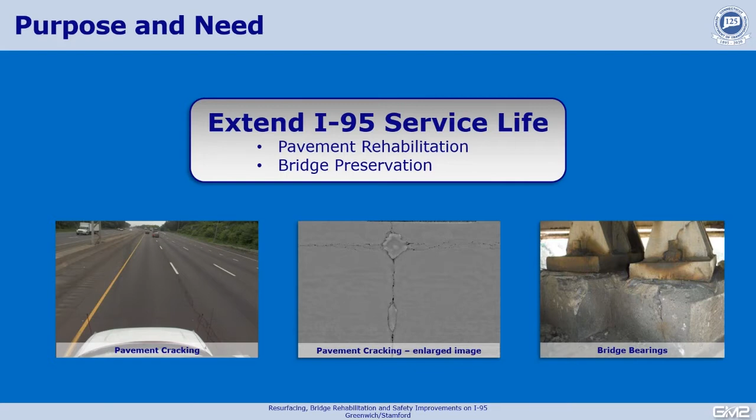According to the National Highway Traffic Safety Administration, approximately 36,000 people die and 3 million people are injured each year on America's roadways. The Connecticut Department of Transportation is committed to improving safety on our highways, and therefore it is a primary purpose of this project. Safety improvements for this project include, but are not limited to, upgrading the median and roadside barriers, upgrading and installation of MASH-compliant guide rail, upgrading the lighting, and upgrading the signing.

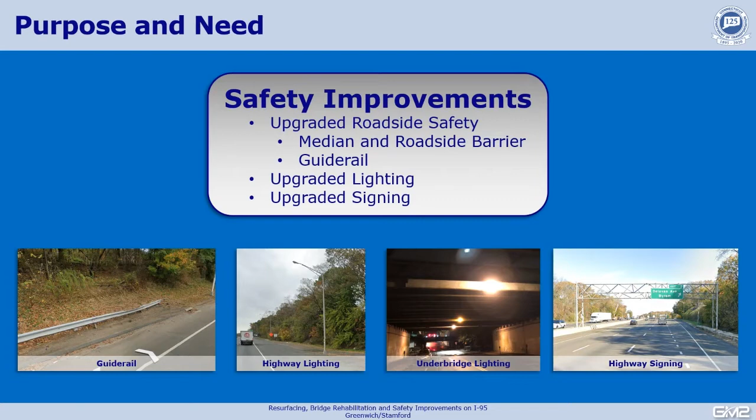While the primary purpose of this project is to preserve and extend the service life of I-95, a secondary opportunity or spot improvement was identified to extend the deceleration lane at exit 3 southbound, which would provide operational and safety benefits as well as congestion relief at this exit. We will discuss the proposed improvements in more detail shortly.

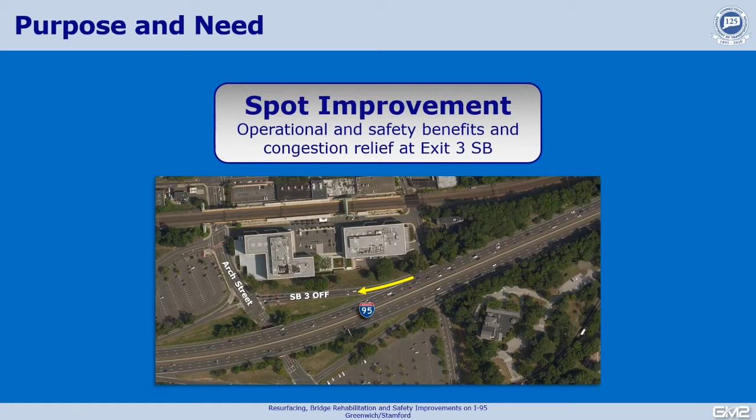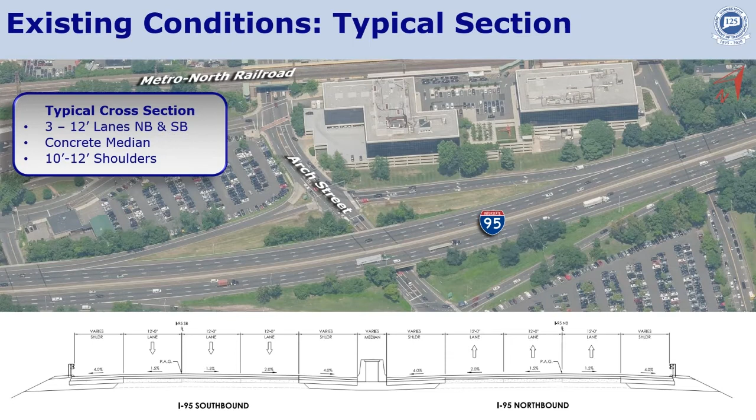Throughout the project limits, the I-95 corridor has 3 lanes of traffic in each direction, separated by a median barrier varying in height between 32 and 45 inches. The cross-section consists of three 12-foot wide lanes in each direction, an inside or left shoulder between 10 and 12 feet wide, and an outside or right shoulder varying between 10 and 11 feet wide. The cross-section will remain as it is today. There is no widening proposed other than the exit 3 southbound deceleration spot improvements previously mentioned.

Crashes were concentrated at the interchanges; however, there was no apparent accident pattern at any one location that would suggest substandard design elements. By far, the most striking pattern observed throughout the project area was rear-end crashes, indicative of congestion, followed by sideswipes, indicative of weaving, cars traveling from one lane to the next, and finally, roadway departures or fixed object crashes, which our roadside safety improvements will address.

As previously discussed, one of this project's primary purpose and needs is to extend the pavement life and restore functionality. As part of that effort, we developed an extensive pavement data collection and evaluation program to document existing conditions and develop a pavement rehabilitation strategy for this project. We utilized digital imagery and the latest technology and performed a pavement surface condition survey, which documented and evaluated the pavement distresses at the surface level. We then mobilized GPR, or ground penetrating radar, to document deterioration and distresses at the subsurface level.

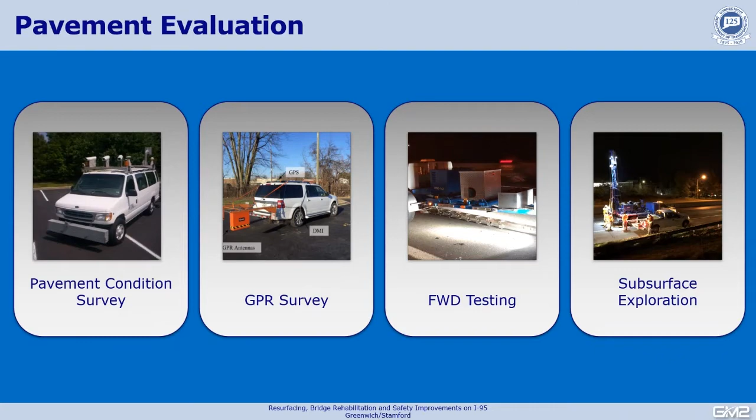Thank you, Tony. Now that we've covered the project background, I'm going to switch gears and discuss our proposed design, starting with the overall scope of improvements. Here is an aerial of I-95 Interchange 3 at Arch Street, with southbound heading to the left side of your screen and northbound to the right.

This project will address substandard roadway cross slopes on the northbound and southbound side. All substandard median will be replaced with standard 45-inch tall F-shaped barrier. Drainage pipes and outlets will be replaced or cleaned. Some selective tree clearing will be necessary for construction and sight distance. All lighting will be upgraded and moved to the median wherever possible.

20 bridges within the corridor will be rehabilitated. All overhead and roadside signing will be replaced. All roadside safety will be upgraded, including the installation of standard MASH-approved guide rail. Also, the pavement condition data that was collected will be used to target and repair the slabs and joints as necessary. And finally, the previously mentioned spot improvement on I-95 Exit 3 southbound, which we'll take a closer look at now.

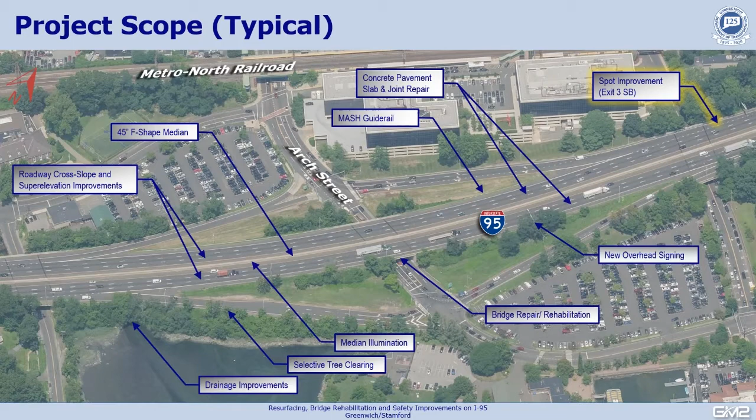Depicted here is a zoomed-in aerial of I-95 in the vicinity of Exit 3, with I-95 southbound again moving to the left and northbound to the right of your screen. This is a particularly congested off-ramp with over 137,300 vehicles per day traveling south, and 10,600 of those vehicles taking the exit each day. Due to these volumes, drivers experience backups onto the main line, which result in higher than normal concentration of crashes.

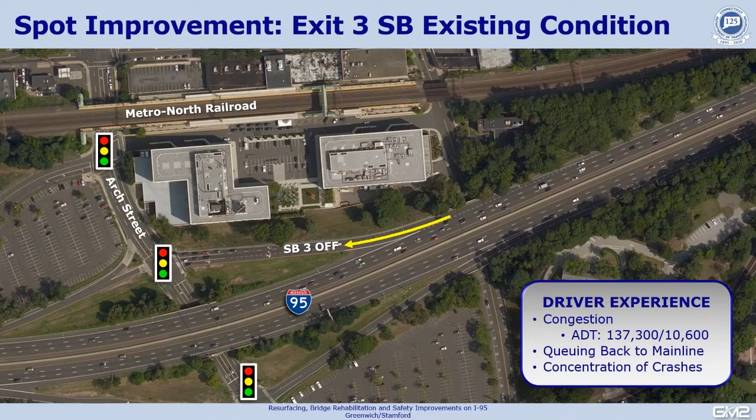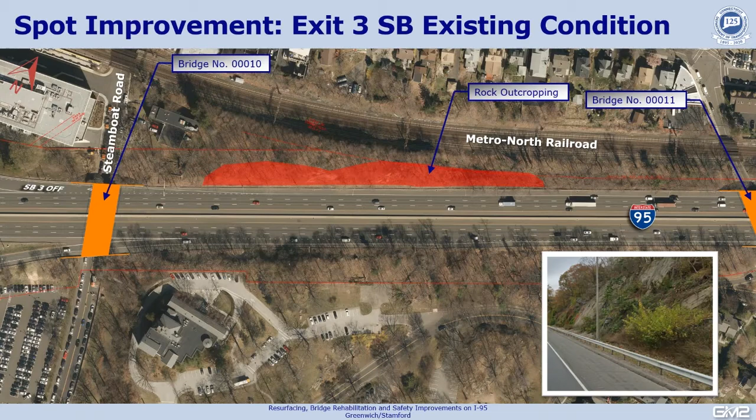Before outlining the proposed improvements, I'll give you some more detail regarding the constraints in the area that needed to be taken into account during the design. Here again, we have I-95 running from left to right. Highlighted in orange are the 2 bridges in the vicinity, bridge number 10 on the left and bridge 11 on the right. Here, highlighted in red, is an existing rock outcropping along the outside of I-95 southbound.

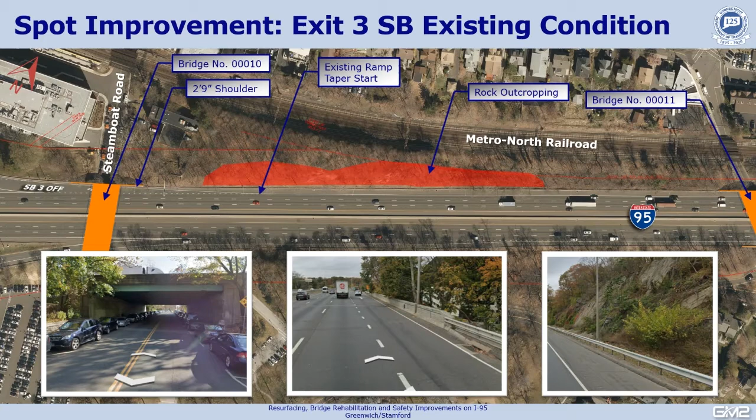And here you can see the bottleneck created by bridge 10, where the shoulder narrows to as little as 2 foot 9 inches. And finally, we needed to take into account the heavy parking needs below bridge 10 when developing a context-sensitive solution.

Now that we know the background of the area, I'll walk you through the proposed spot improvement at I-95 southbound Exit 3. The thin section of yellow along I-95 southbound indicates the new pavement being added. The blue indicates the section of rock outcropping that is being removed, and the red indicates the portion of rock outcropping that would remain untouched.

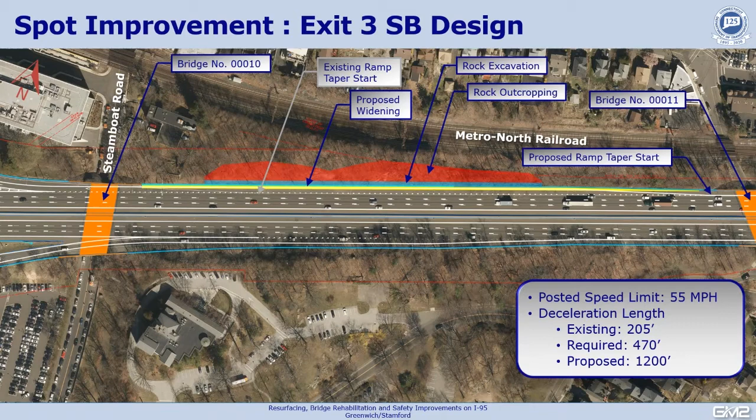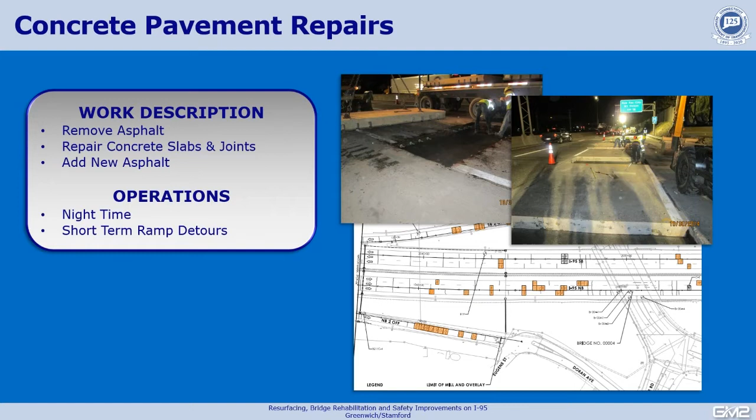Here is a slide depicting the proposed concrete pavement repairs. To the right are pictures showing the operations, and below them is a sample of our plans depicting the concentration of repairs shown in orange. The work entails the removal of all asphalt, exposing the concrete slabs below, repairing the slabs and joints using the data collected as a guide, then the addition of the new asphalt on the newly repaired concrete. All work is proposed to be done at night with short-term single night ramp detours to minimize impacts to the traveling public.

As previously mentioned, there are numerous bridges being rehabilitated as part of this project. There are 23 bridges in total. 3 overpasses have no proposed improvements, leaving 20 in the contract. 2 of these bridges are over navigable waterways, bridge number 1 over the Byram River and bridge number 6015 over the Mianus River. The repairs include the replacement of median on 3 of the bridges, deck repairs and asphalt replacement on all, improved lighting under the structures and bearing repairs, and the relocation of utilities whenever they're present.

We already mentioned the improvements being made to the drainage network. We'll go into a little bit more detail now. Many of the pipes along the corridor, especially the metal ones, have reached their serviceable life and are deteriorated beyond repair. Nearly all the pipes are inundated with hardened sediment, and outlets are clogged and catch basins are in various state of disrepair.

Proposed improvements to the drainage system include the cleaning of all remaining structures and pipes, outlet protection installation, new structures and new pipes where required, improved swales and water quality, and the construction of access roads.

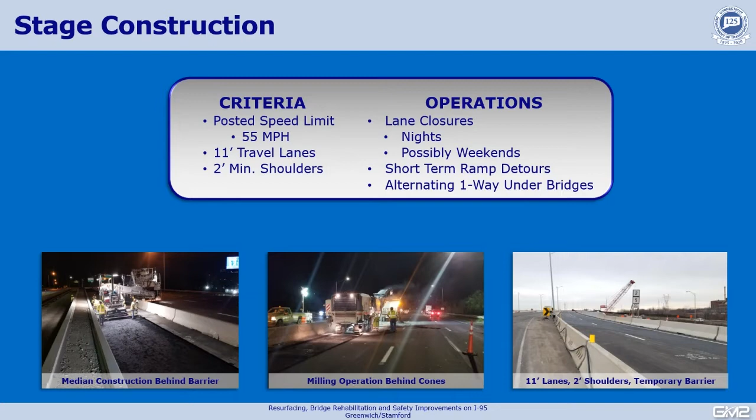Short-term detours will be required, and for the most part, alternating one-way traffic will occur underneath I-95 bridges over local roads. Below you can see some typical construction activities. On the left is nighttime median reconstruction behind barrier. In the middle is a milling operation behind traffic cones. And on the right is a typical daytime traffic pattern with 11-foot lanes and 2-foot shoulders.

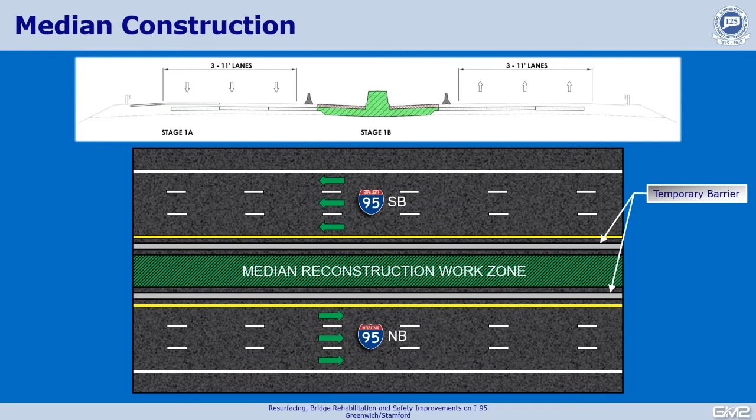This slide depicts the stage in which the median is being reconstructed. This work is highlighted in green in the cross-section picture above and the graphic below. Traffic will be shifted away from the median and protected by temporary barrier while the median is being reconstructed. Again, these will be 11-foot lanes and a 2-foot minimum inside shoulder with a wider shoulder on the outside.

Now that the median has been reconstructed, traffic can be shifted to the left-hand side in each direction. The barrier can then be moved to the outside of the highway so that work can be done to the shoulders safely. This is also the stage containing all of the concrete slab repairs, which I'll go into more detail next.

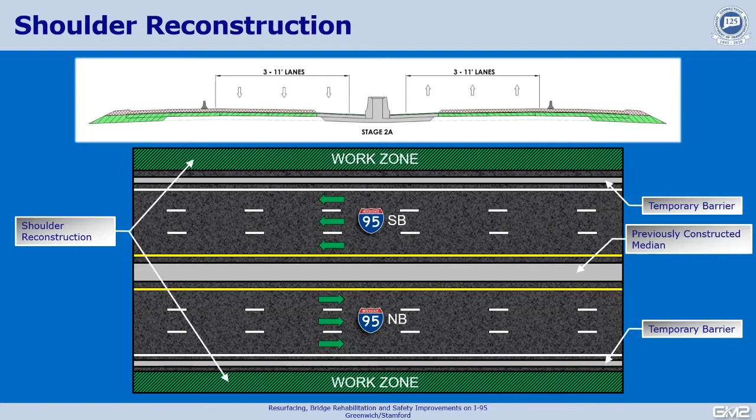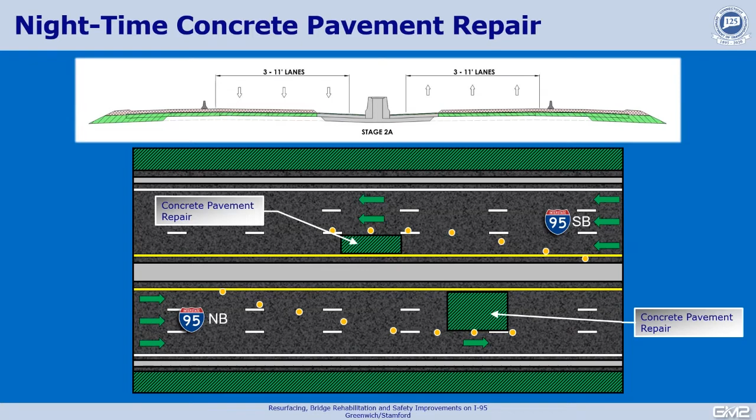There will be short-term impacts to local roads crossing underneath I-95 as repairs are being made to the bridges. Most of the roads will remain open throughout construction, utilizing either alternating one-way traffic or reduced roadway width while all lanes are operational. The work being done on the bridges over South Water Street and River Avenue require temporarily closing

To evaluate the environmental impacts associated with this project, there are various permit requirements, including the NEPA process. We will obtain the necessary permits for flood management and construction activities, and as the design progresses, coordination will be required with the Coast Guard, Fisheries, and Army Corps.

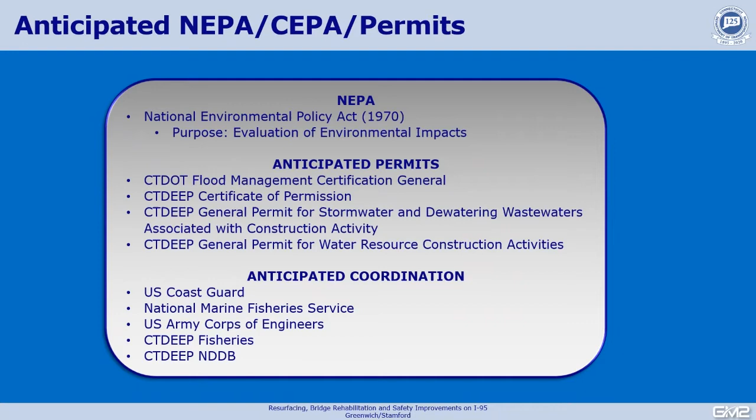Some of the proposed bridge rehabilitation activities will result in impacts to the operations at the commuter lots in the vicinity of Strickland Road, River Road, and South Shore Drive. These will be short-term partial closures during construction activities only. We will coordinate with the Greenwich parking official to ensure these impacts are as minimal as possible. And with that, I'd like to hand it back to Tony, who will discuss the upcoming schedule and costs.

Thank you, Ryan. Now we will discuss project schedule and project costs. In terms of schedule, this evening is the formal public informational meeting, the purpose of which is to increase awareness, engage a wide audience in information sharing and discussion, but most importantly, receive feedback from the community and stakeholders. Prior to this evening, we met with the town of Greenwich officials in October to inform and receive some initial feedback about the project. We are available to meet again with both town and city officials, as well as any and all stakeholders to continue information sharing and discussion.

Next steps will be design approval and NEPA approval anticipated in March of this year. That will authorize us to proceed with final design, which would be completed in March of next year. We anticipate to go out to bid in the summer of 2022. The contractor with the low bid would start construction, or shovel in the ground, by fall of 2022. We anticipate a 3 to 4 year construction duration.

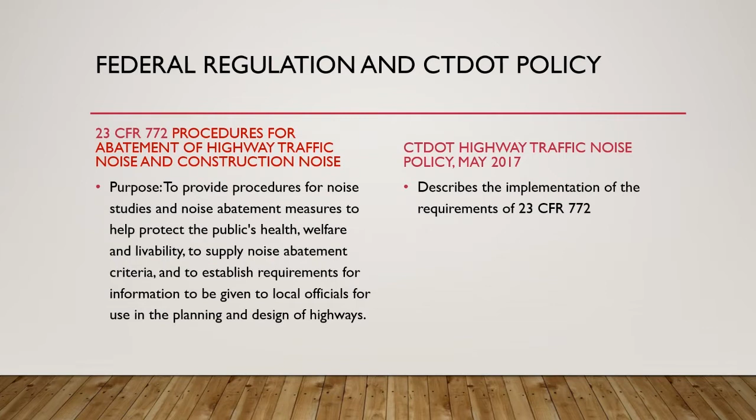Next slide. The regulation requires noise to be analyzed when a project is funded with federal aid highway funds or if it requires FHWA approval regardless of the funding source. It also must meet the definition of a Type 1 project.

Next slide. A Type 1 noise analysis is required for a proposed project that consists of a new highway built on a new location, interchange modifications, an existing highway that is significantly altered by substantially changing the horizontal or vertical characteristics of the road, or the number of through lanes are being increased, as well as if auxiliary lanes are added, meeting certain length criteria defined by FHWA and Connecticut DOT.

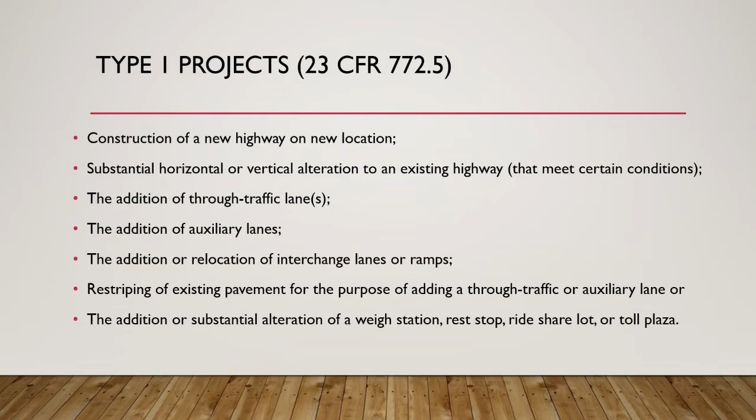The project's proposed resurfacing, safety improvements, and bridge rehabilitations did not meet the eligibility for conducting a noise analysis, and therefore one was not conducted under this project. Thank you, Neil. Back to you.

Thank you, Christine. We understand, obviously, there are quite a few questions in regards to the requirement for noise barriers. It is a similar concern that we have throughout our state projects, throughout the state. And again, the type of project, as Christine mentioned, dictates how we go about pursuing if a noise study is required.

And again, in this case, our purpose and need is specific to what we call state of good repair, and we want to address the pavement conditions. We want to address the minor bridge rehabilitations. We are not expanding the highway with this project. It's really to extend the service life of the existing pavement surface and upgrading those safety improvements.

So I'm going to see what other concerns we have here, and we've got a question. What is the impact to exit 2 going south? Are we widening the lanes there? And I guess there's a follow-up to that. Will this presentation be recorded and posted to the site? Yes, I'll answer that second one real quickly. A copy of this presentation will be available after the meeting on our project website. So again, what is the impact to exit 2 going south? Are we widening the lanes there? So Tony, I will send that over to you.

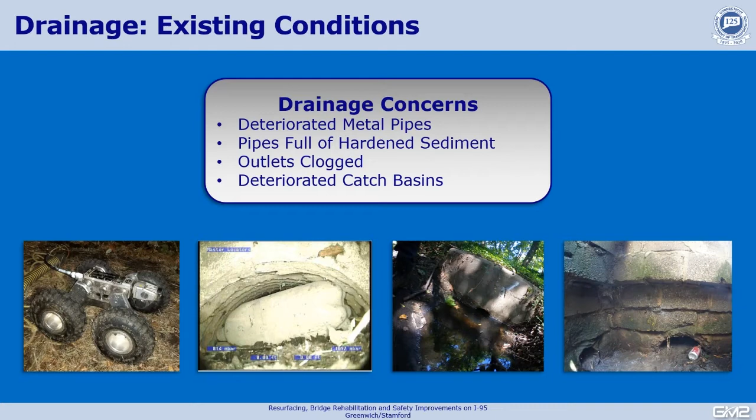However, there's a number of opportunities here to improve the drainage system through this corridor. Our approach for this opportunity is to focus on individual outlet systems and improve those where feasible. We're going to install a number of stormwater quality swales in the infield areas, roadside ditches. We're also going to disconnect any impervious surface areas.

We're looking to encourage sheet flow by getting rid of the curbing and having that sheet flow through the grass to be able to remove some of that sediment. And finally, we're going to install some scour holes at most of the outlets through this corridor. And the new catch basins will also have deeper sumps to also collect sediment. So again, there are a number of opportunities to improve the stormwater quality along this important coastal area. Thank you.

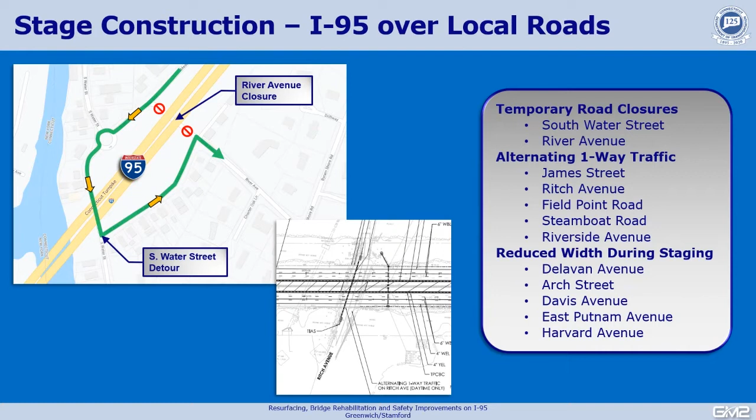These are the only two roads that are proposed to be closed for any duration. These will be short-term durations. These will be only during the daytime, and they will open back up at night. If work is being done on one road, the other road is going to be open, so that the detour is going to be very minimal and easy to get around. Back to you, Neil. Thanks, Ryan.

So let me take a moment here just to explain again, Tony had mentioned, and I'd like to repeat it in terms of where we are in the design process. We are at what we call 30% design. Our next steps are to proceed with our federal approvals. Upon those approvals, we move into what we call the final design phase. And so as we are going through the design phase, tonight is very helpful in terms of comments and recommendations and questions. We will refine that design as we go forward. That's something that I just wanted to let everybody know as we move forward.

There are other aspects of the project. One in particular, which is very impactful, is how do we stage the project? How do we do the construction with minimal disruption to the traveling public? Always a concern, especially in this corridor, this part of 95 in the state. We understand with the heavy volumes, and most of that construction work will take place during the evening hours. And we are looking at some innovative ways possibly to try to expedite construction, as we always do throughout our projects.

Next question here. You have already affected significant tree removal. Will you replace any of the trees with other natural screening with carbon retention capability? So in regards to the trees, we understand our maintenance operations have been doing work throughout the state, continuing to make sure that the safety of the highway with the trees is taken care of. As we move forward in the design, we will be looking at areas of what we call vegetative buffers, looking to incorporate vegetative buffers.

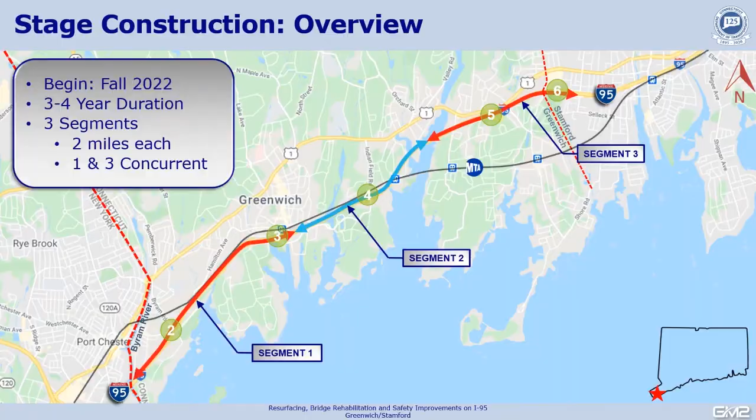Thanks, Tony. Looks like we've got another question in regards to an adjacent project. Has the timing of this project been coordinated with the timing of the construction work at the New York border on the intersection of 95 with I-287? Do these projects overlap? So before I give it to Tony, yeah, we are coordinating with New York State. We've reached out to them on one occasion, but yeah, they will be coordinated. So we understand the proximity in terms of the overlap.

Tony, if you want to talk about the schedule in terms of our anticipated construction schedule, because the New York project has been in construction, let's say almost 2 years, but hopefully they'll be done. Great, thank you. So again, we're anticipating shoveling the ground in fall of 2022. The good thing about this 6-mile corridor is we have the opportunity to start at one end versus the other. So we're going to continue to coordinate with New York to really minimize those overlaps. But again, we do have the opportunity to refine our construction schedule to really mitigate some of that.

Again, our project will have some lane shutdowns on the New York side. So we're going to continue to coordinate during those time periods. But again, our project is primarily repaving and repair of the concrete pavement. We're not doing any widening. So this overlap, I don't see this as being a significant issue, and it's something that we continually do with a number of projects that are sometimes in the same corridor. Thank you. Thanks, Tony.

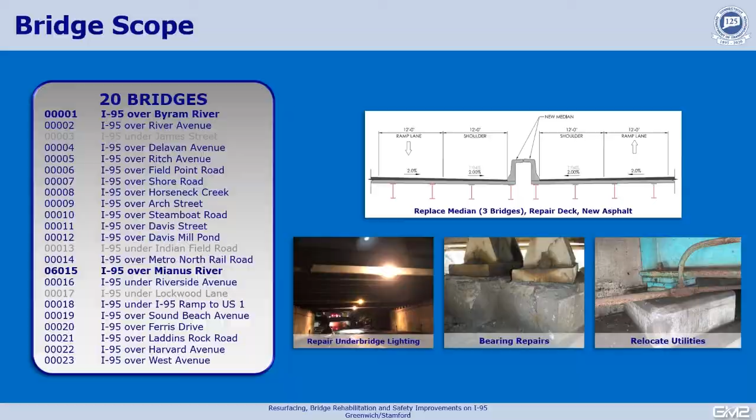In terms of sidewalk impacts, again, the repairs to these structures are maintenance in nature, including some joint replacements, some bearings, and substructure repairs. But we're not going to be reconstructing sidewalk or the roadway underneath on the local roads. So again, the repairs to the bridge are maintenance in nature, substructure repairs of the concrete abutment, steel repairs that will not require any kind of reconstruction to the local road below. Thank you. Thanks, Tony.

Okay, another question in regards to detours, I think. Will traffic be routed onto Post Road during portions of the project when working on the Exit 5 bridge? So that Exit 5 bridge would be the connector from Route 1 onto 95. So I will go ahead and ask Tony to respond to that. I'm going to ask Ryan for the detours because he spent some time on detours. I want to give him a chance to add some comments here. Right, as noted, this is like the detour that we showed on the slide, and this is typical of all of the detours that we're designing for this project. We're trying to keep traffic on 95 as much as possible.

So anytime a ramp is closed and anytime you're doing any kind of repairs on an existing ramp, you're going to go to the next ramp up, take that exit, advance to the opposite direction of 95, and take the same exit that you were going to take, just in the opposite direction. So anytime a ramp is closed, for instance, going northbound, the southbound version of that ramp is not going to be closed. So you'd be able to stay on 95 just for that one exit and then turn back around. So state routes would be used whenever necessary. And we would prefer to use a state route as opposed to any of the local roads, because we don't want to impact any of the local neighborhoods in the area. But that's generally the methodology of the detours.

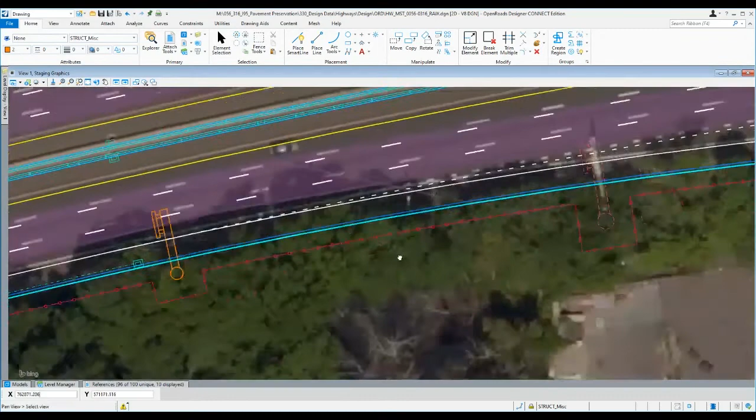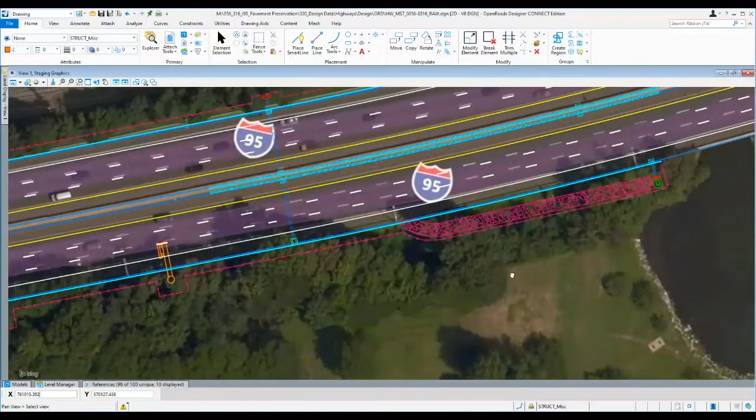Also for installation, for example, of an overhead sign, so there might be some trees we're taking down to put in a structure. We're also putting in this outlet shown on this drawing here. This is a drainage catch basin and a pipe. So obviously over the years, there's been growth, but we'll have to clear that area to get access. Again, these are all spot locations. This drawing shown here is an access road to get down to the drainage outlet.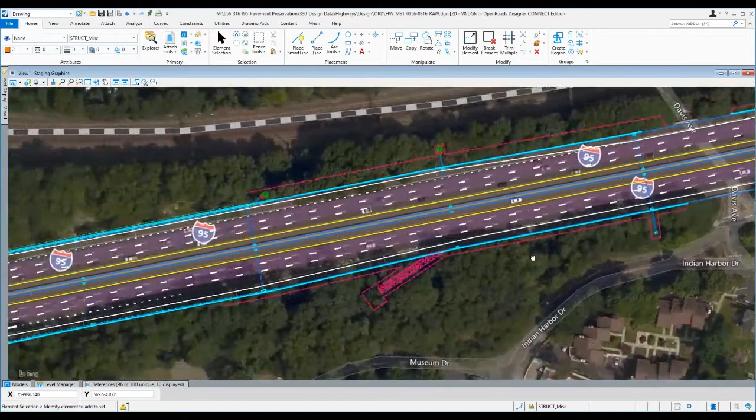We will try to repair these areas as best we can, but again, it's all spot locations through this corridor to get access to improving the outlets, installation of signs, and other sight distance issues that we talked about, as well as, again, clearing of the overburden so these trees could not potentially fall on live traffic. So I think that really summarizes that response. Neil? Thanks, Tony.

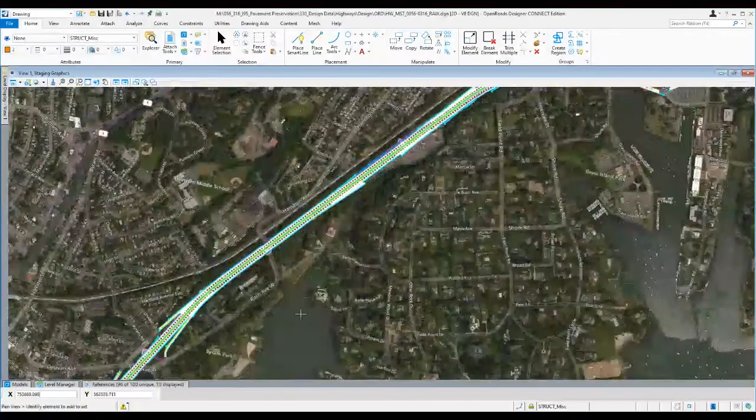So we've got a follow-up to exit 2 going south. Kind of a comment. I wish you could close exit 2. Everyone flies through that stop sign going south. Tony, I don't know if you can just kind of discuss the operations there at exit 2. Yeah, absolutely. So first of all, thank you for your comment. This is exactly why we have these public outreach programs. We are 30% design, so we do take your comments into consideration.

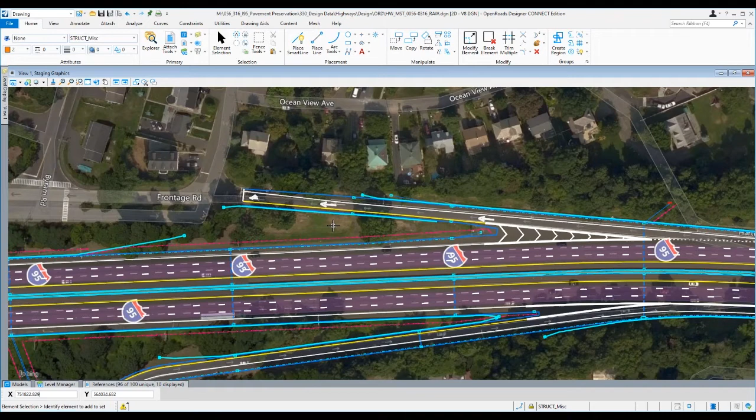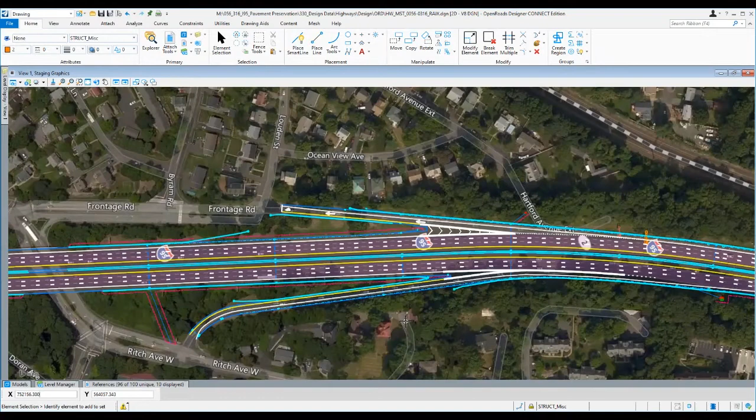I don't think we're going to close this ramp at this point, but we will look at maybe improving some signage to reduce the velocity of cars traveling through there and blowing through that sign that was indicated through this comment. We'll have some additional illumination. Again, our goal is to get comments back from you folks to identify these types of issues. So we'll go back and look at this particular site, see if there's any issues. Our analysis didn't find any high accident areas beyond the normal areas. But again, we can look at adding signing to eliminate that problem, as well as the illumination. I think that will help assist that. Thanks, Tony.

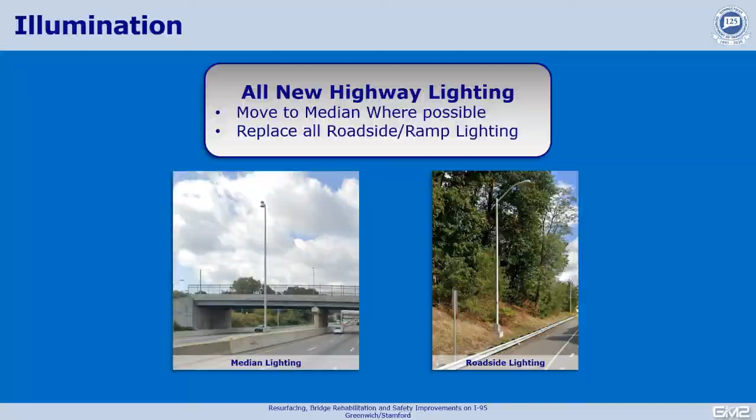This is Ryan from GM2. If that question was potentially related to the highway illumination itself, all of that is being replaced throughout the corridor. So any of the existing lighting that is on the mainline highway of 95 is going to be replaced. Much of that, if there's room in the median, will be moved from the roadside to the median. And any roadside lighting along the outside will also be replaced, and that's full cutoff lighting.

So, question here: Riverside Association also received many complaints about the increasing pollution from the emissions from the trucks and cars. You can smell the exhaust on the Eastern Middle School grounds. Is there a regulation that deals with the fumes emissions issue?

So in regards to the air quality, it comes back to our intended purpose and need of the project. We're not expanding the project in terms of lanes, which would require an air quality analysis at a project level. This project does conform within what we call the regional conformity air quality plan. That is a plan included in the statewide transportation improvement program, which goes out from the department, I think every year, maybe twice a year, to the regions. So that air quality analysis is done at the regional and not at a project level.

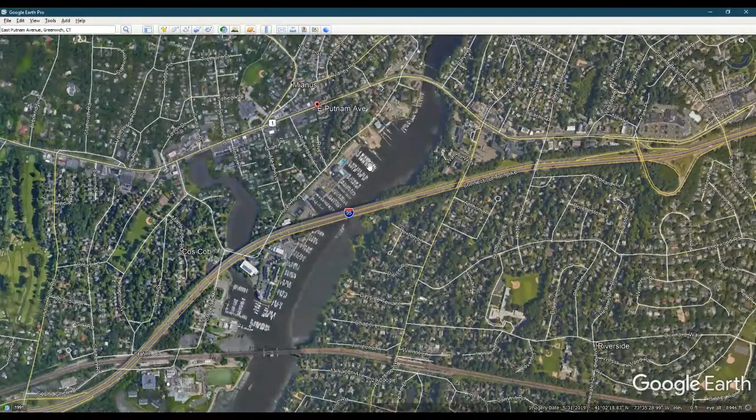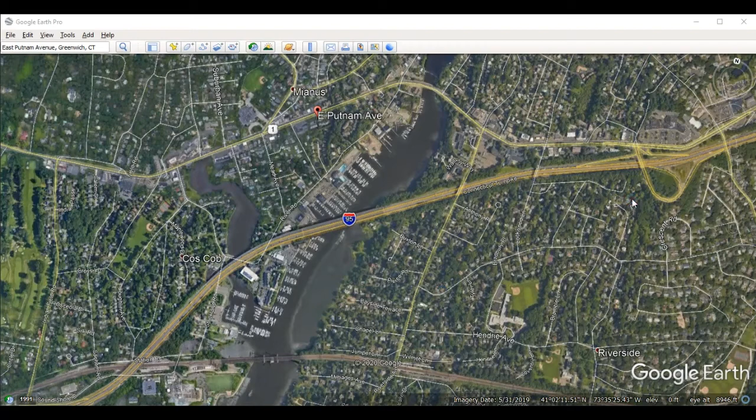And I'd like to add, as I mentioned, going forward, we will look at refining the design. One of the things that we're starting to do throughout the state, and many of you may have noticed, is that during construction and within these construction zones, you'll see the trailers that have the updated real-time conditions in terms of the travel times. We call those smart work zones, similar to what you've seen probably on Merritt Parkway and then I-95 in Norwalk.

What we're trying to convey is real-time conditions to the traveling public, so that you know what's happening up ahead, incidents, and we just want to make sure that everyone is well aware. We will be using those signs for any nighttime closures of any ramps that may need to be closed for short-term duration during the nighttime operations.

I know we haven't specifically discussed it, but Ryan, I don't know if you want to touch on the ramps specifically, in terms of why we would need some of those closures at night, and some of the possibilities for detours. Right. So any closure that's happening to the ramp, and again, as we said, these are short term. These are single night. You're going to have ample notice, at least a week notice when a ramp is going to be closed.

That work is strictly for either resurfacing of the roadway, repair of a concrete slab below the bituminous, or a replacement of an existing pipe that's crossing underneath the roadway itself. So we're not anticipating those being long term. We're not anticipating any work that's going to take more than one night, that you can't open that lane, or that exit or entrance ramp, back up after the overnight work session.

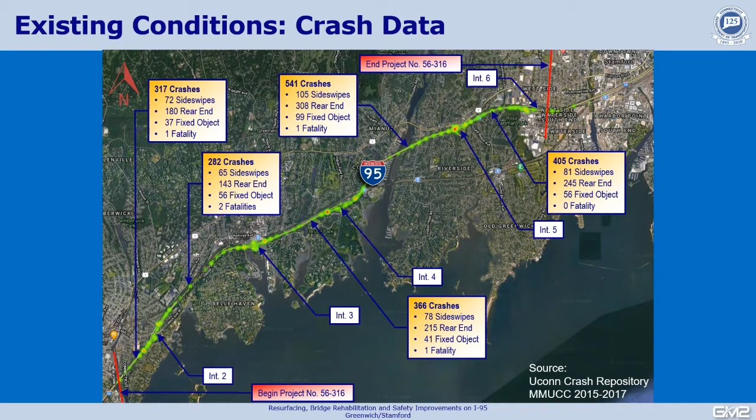In terms of the clearing for sight distance, it really wasn't based on the number of crashes. It was based on the FHWA design criteria for design speed and the sight distance required along that curve. We want to provide that sight distance for any future potential accidents. It's only the minimum required to meet that criteria around the corner, because a stalled vehicle beyond what you can see would obviously be a safety issue.

Most of the tree clearing along this corridor is approximately 2 acres total along the 6.6 miles. There were a few questions about the number of trees. I don't have the actual number of trees that will be removed, but we do have that acreage. It's mostly associated with the installation of the drainage. We will obviously be replanting where we can. It takes several years to grow back, but that is the general scope and goals of this project.

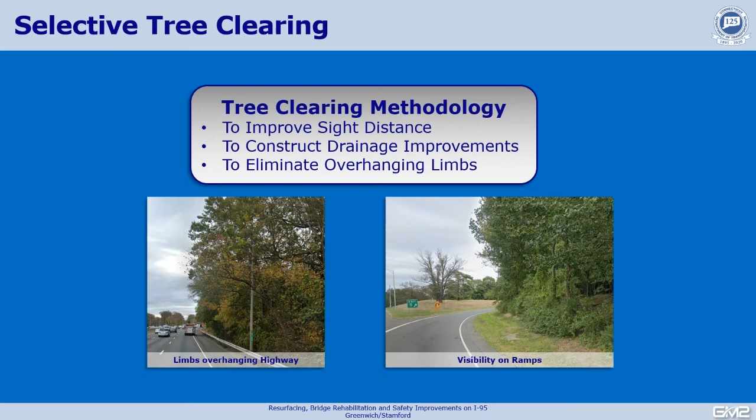Thanks, Tony. Thanks, Ryan. Okay, another question. I realize this is not on point to the upcoming project, but exit 5 is littered with downed trees and piles of debris, some adjacent to the roadway. It has been this way for months and it's dangerous. When will this be addressed?

Okay, thank you. That's a good comment, and we will make sure our maintenance folks are aware of that so they can address it, especially the downed trees. We obviously don't want any of that getting kicked into the roadway during a storm. So yes, we will make sure maintenance is aware.

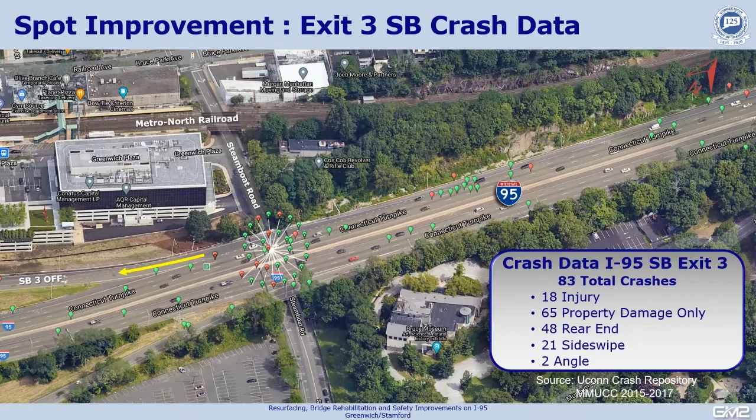So taking that traffic out of the main line and putting them in that deceleration lane, which is that rightmost lane that you're seeing on the screen, taking them out as early as possible does twofold. It reduces the amount of cars that are going slower trying to anticipate that exit, and it also takes some of that backup that you're experiencing on the exit 3 southbound and puts it in the decel lane as opposed to the right-hand lane of mainline. Back to you, Neil. Thanks, Ryan.

Okay, another question in regards to construction. Where are the major construction staging areas going to be located? I can grab this one. Sure. So again, this is Ryan from GM2. We have identified multiple areas along the corridor. Again, it's 6.6 miles long. Many of them are gore areas, so they're the infield areas between the ramp and mainline. So we're trying to identify those areas as much as possible.

And if there's any area required that's beyond what's available on site, we would have to investigate with the contractor any areas off-site that would be used. However, we're hopeful that we can store everything that we need in those gore areas along the corridor, in an area that's already open, already an infield grassy area, wherever possible. Thanks, Ryan. And just to add to that, as the contractor comes on board and proposes staging areas, that has to go through an approval process with our construction folks who oversee the construction phase.

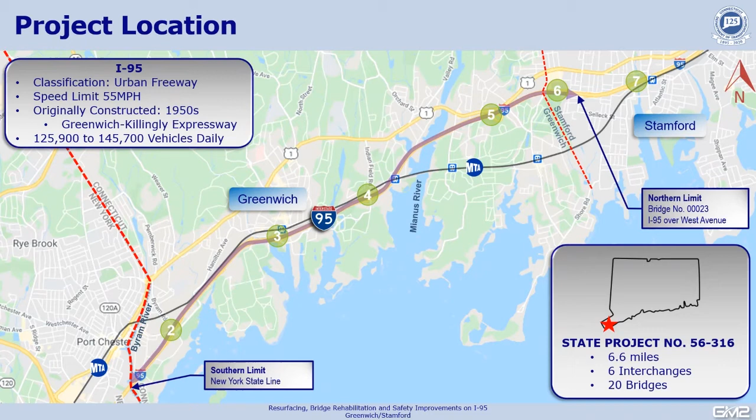You'll have ample notice, and we're trying to make sure that we keep that traffic on main line as much as possible. So all of those are going to be single night duration. So if a ramp is closed one night and there's more work necessary, it will be opened again during the day and then closed again during the night. So it's single night detours, but depending on the level of work that's necessary at each ramp, it could be multiple nights, but as I said, it would be opened again during the daytime.

Great. Thanks. And I'll just add on to that, Ryan. Again, this is Tony. We will give the public a minimum of 1 week's notice prior to any detour. Once we start construction, we're going to have extensive public outreach. We'll include a public website. We'll have email news blasts to make sure that the public is notified of which ramp is detoured during which night.

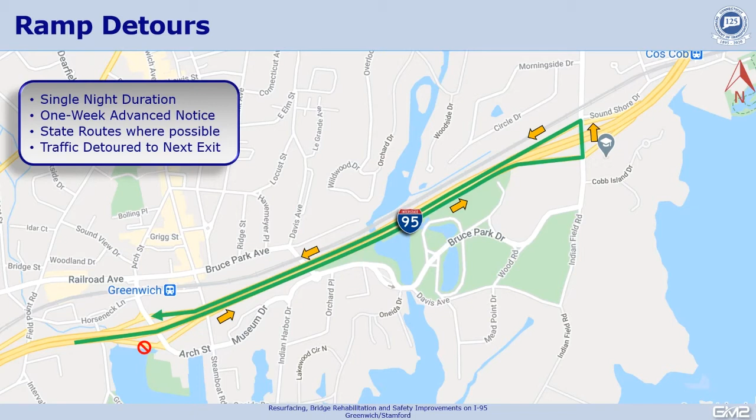Now, the question that we got here: will you please reach out to the town of Greenwich on the specific issue of landscape buffer?

So yes, when we did meet with the town, we talked about what we'll be doing as the design gets progressed in terms of some opportunities, and we will be coordinating. We'll coordinate with the town. We have what we call, as we go into final design, a semi-final design, which we call a 60% completion, and then again we have a 90% as we get towards final design.

And in terms of schedule, Tony had mentioned the schedule for the project, with construction anticipated in the fall of 2022. I just wanted to add also, he talked about when our design would be complete, and we can't secure construction funds to go to construction until we obviously have a complete design, until we have any permits approved. So we've got to go through the permit process. We do not have any right-of-way impacts on this project. And so we need to have that. We have to have our funding secured before we can go to construction.

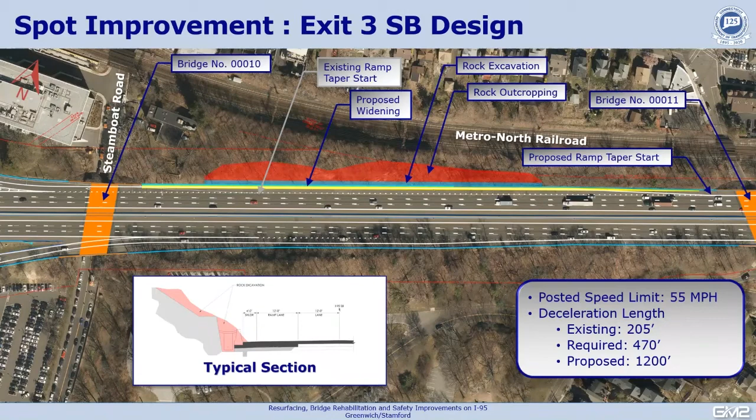Okay, another question. There's talk about a new off-ramp between exit 2 and 3 northbound. Is that true? Not to my knowledge. In terms of access, in this area there is plenty of access, and we've had access issues in other parts of the state on I-95, but no, there are no plans for a new off-ramp between exit 2 and 3 northbound.

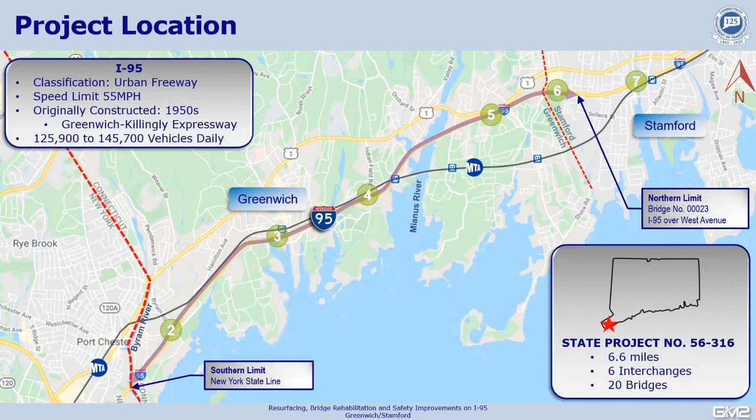Okay, another follow-up question in regards to sound barrier. Did you consider putting up a sound barrier on the southbound side between exits 4 and 3? So again, as we have discussed previously, this project does not qualify for noise analysis given the scope of improvement. So at this time, there are no noise barriers proposed.

Okay, question from, let's see here. At exit 5, there's been an attempt to deal with parked trucks by piling wood chips. Maybe a wood barrier would be more effective and more attractive. Is this issue going to be addressed with this project? So it seems like there are some issues with the exit 5 off ramp, which we will be forwarding to our maintenance folks to address in terms of the debris. And so we will have that discussion with them specific to this area, which is exit 5, the exit for Route 1, Post Road.

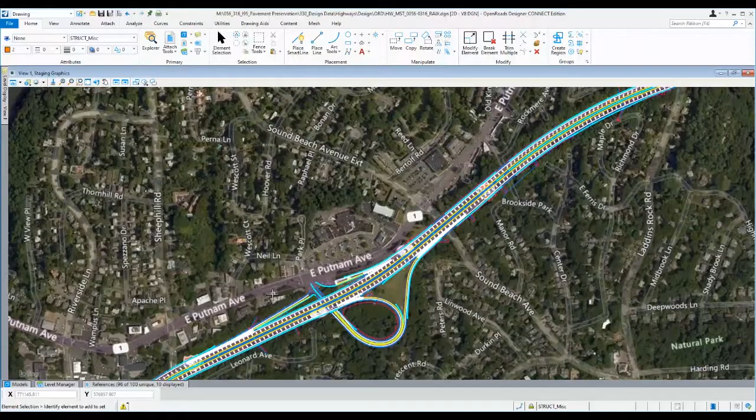But as through our design, we are evaluating the roadside safety throughout the entire corridor. So yes, as Tony mentioned, we're replacing all roadside safety elements, such as the metal beam rail, with the newer compliant MASH guide rail. And also in some cases where if we're moving an overhead sign or if we're connecting to a bridge, we're going to update that with some roadside barrier. So I can go into CAD here. So here you can see, throughout the corridor, I'm at a bridge right now, along the outside, we're updating all of the guide rail along the outside. So here you have the guide rail with the anchorage there, and that continues all the way through.

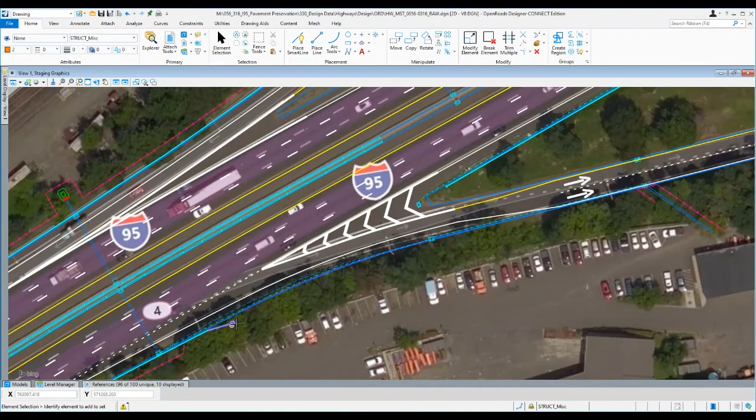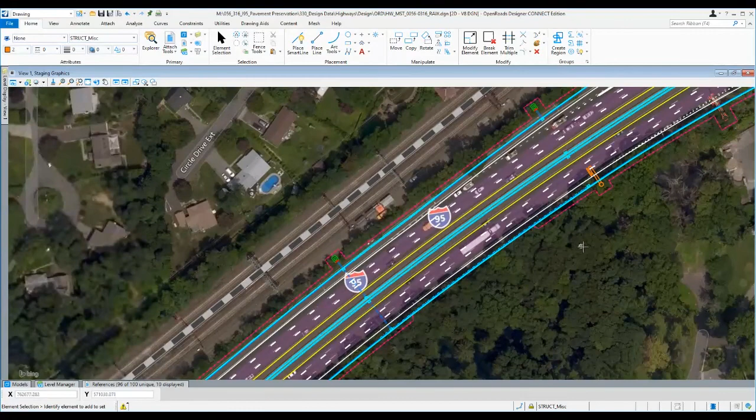So we're going to be protecting any of the new roadside appurtenances, such as the overhead signs, and in any other locations where vehicle safety is a concern, where some off tracking, some roadway departures could be possible, we would take care of that. Here's a section where you can see guide rail exists today, and we're updating it with some newer barrier, for various reasons, but all safety related for the corridor. Thank you.

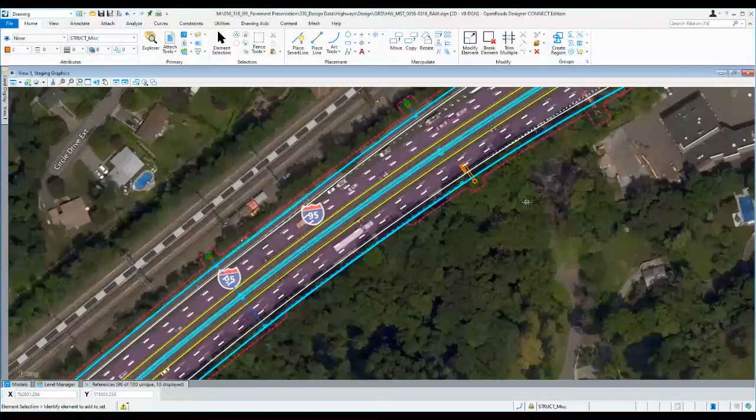Thanks, Ryan. The question here, will you be presenting a vegetation management plan to the town of Greenwich before any trees are to be removed, to our first selectman and town tree warden? Essentially asking, will you be presenting a plan to the town of Greenwich? So again, in terms of the tree clearing, all the tree clearing that we'll be performing is within the state right of way. We will continue to try and limit the tree clearing as much as possible. We understand, we've heard the concerns today. We will also be looking, as I said before, with our landscaping unit, at those sustainable vegetative buffers where feasible.

It all depends on our maintenance operations. Also depends on the area and the environment, in terms of what would actually survive in some of these areas. So we will be going through with that. But in terms of presenting the specific management plan per se, we wouldn't have that go through approvals through the town, but we will be discussing our plans as we move forward with the town.

Okay, another question here. Is there anything more that can be done to stop trucks parking on the southbound side between exits 3 and 2? There's an on-ramp there, and trucks often cross the on-ramp to park in the no parking zone opposite the weigh station. Yes, we are familiar with the old toll station area with the wide pavement, and we have taken a look at this area. We want to have discussions with our highway operations unit out of Bridgeport as they patrol that area specifically, and some of our other support units within the department, in terms of how we best treat this area.

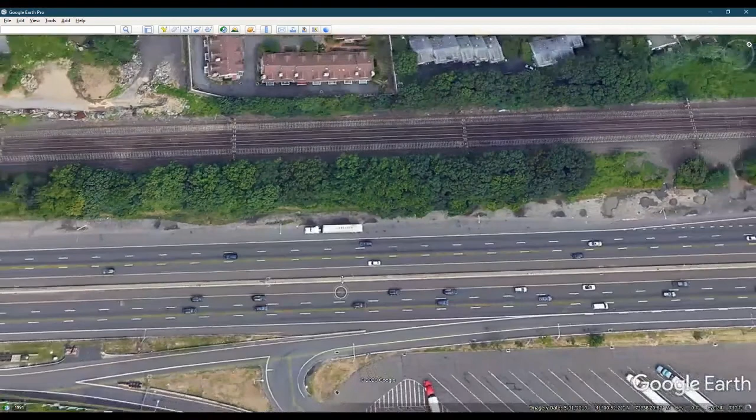It is, yeah, especially when the weigh station's closed because the gates are closed, I believe. So thank you for that comment. Thank you, everyone, for your comments.

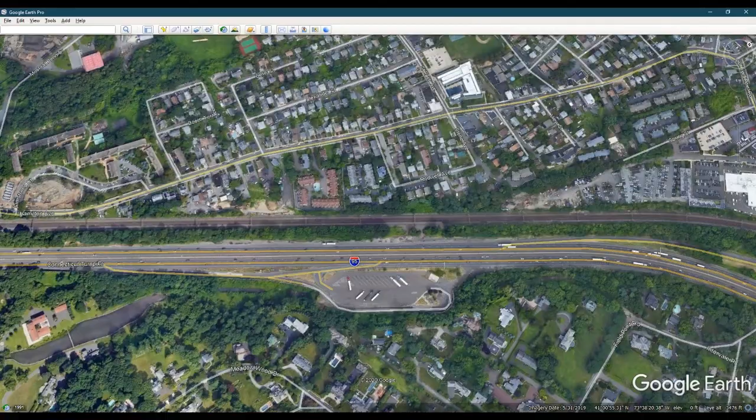We have been doing a few of these virtual public informational meetings now since the beginning of the pandemic, and it seems to be received well by the public. There is a lot of work behind the scenes, but we do get more feedback and we have more people attending. It's a positive, something that I think the department will probably take into consideration as we move forward.